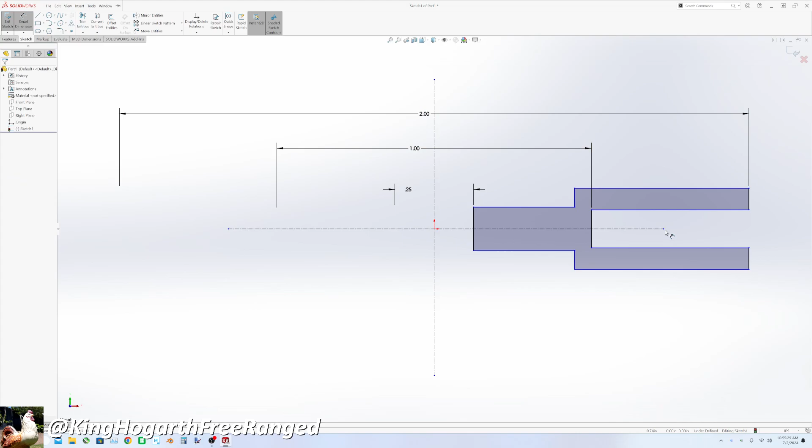So the wheel for this one is a little smaller than the original project's wheel. This one is a 2-inch diameter. I think that one was a 3, maybe 4-inch diameter wheel. So after designing the shape and size of the pulley, I decided to put the holes in the face of it, put 8 holes around the hub of the wheel, cuts down on plastic. Not sure if it has any other benefit besides that, but that's what the original project had, and that's what I'm going to put on here.

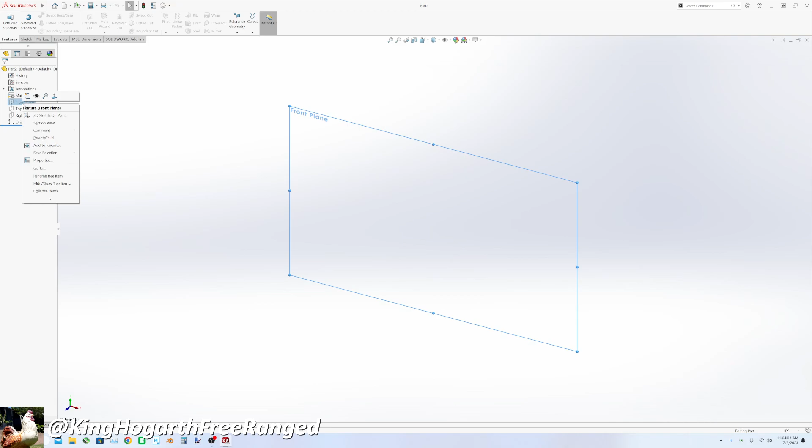Next, I worked on the stand. Now the stand is a very simple bracket looking part with a base plate and 2 right angle protrusions coming out to hold the axle and wheel in, and then there's triangular gussets going up to hold it in place. The base plate also has 2 holes in it to be mounted to things.

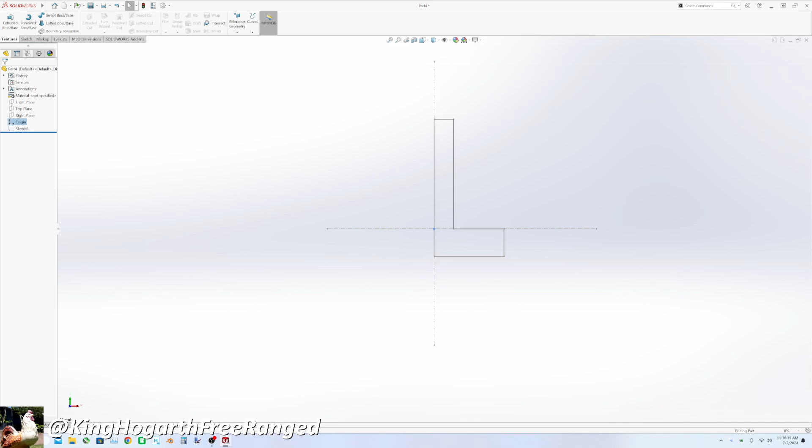After designing the stand, I moved on to the axle, which is a very simple design. It's just a tube with an end cap, and after that I went to the last part, which is the retention pin, which is just a small cylinder attached to an end cap. So to model all these parts, it only took about an hour, but that's probably because I already designed this thing back then and it always kind of lingered in my mind, so it didn't take too long.

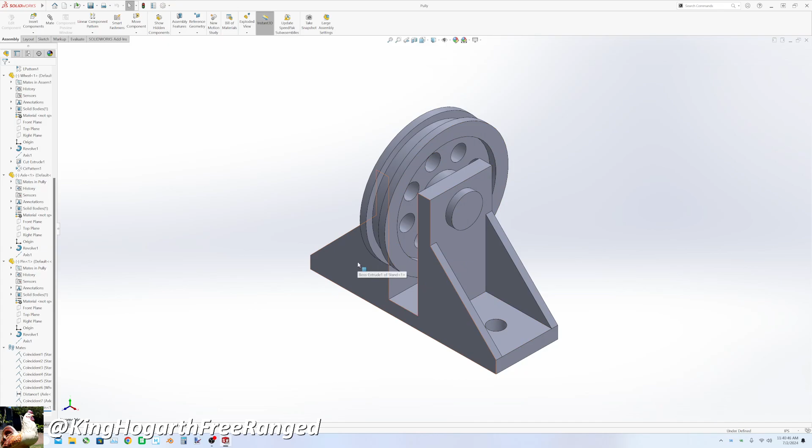So after the designs were complete, I made a quick assembly to make sure all the parts looked okay, and after that exported all of them to STEP files and imported them to Bambu Studio. So after I positioned all the parts and added supports, I sliced it and sent it over to the printer, and it took about an hour to print the initial print.

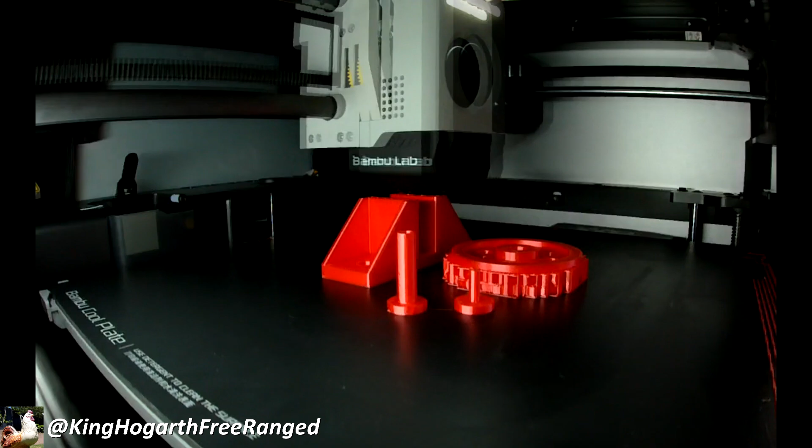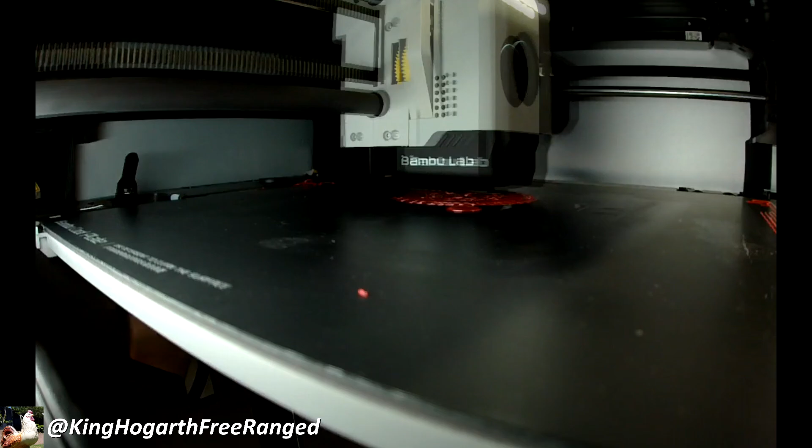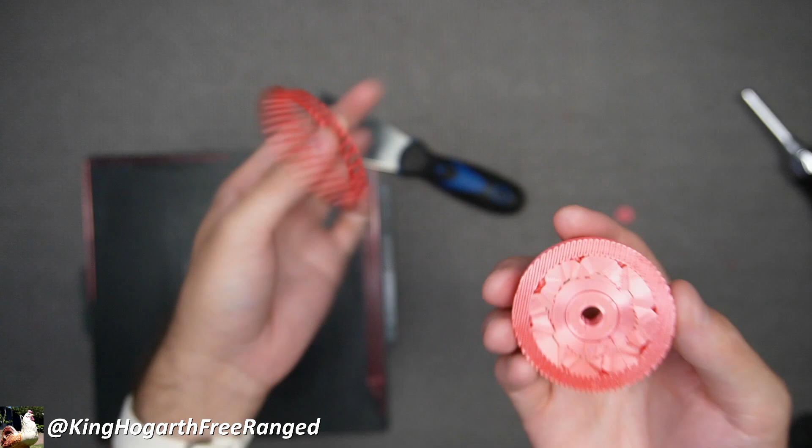After it finished printing, I took all the parts off of the build plate and I broke the retention pin. The retention pin just snapped clean off. And also the supports on the wheel kind of just ruined it. So after that, I decided to reprint the wheel using the tree supports and make a new retention pin with no changes. In the case of the wheel, the tree supports did do better, and it came off a lot cleaner. However, the retention pin still snapped. This time, rather than removing it from the build plate, it snapped when I tried to install it.

So I decided to make the hole in the axle bigger. This also made the walls a lot thinner. So when I decided to print it, I don't think the printer liked how thin they were, so it warped. And it was so bad that the axle had a much larger diameter than what the model had.

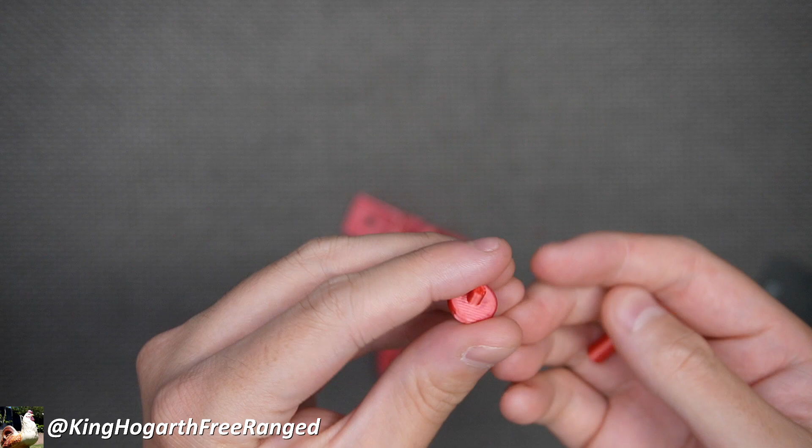And after printing it twice to figure out what was wrong with it and breaking the original stand, I decided to just go back to the original designs, but instead of making the retention pin long, cut it to about half of its original length and adjust the sizes to make it fit a little bit nicer. And after that, it worked just fine.

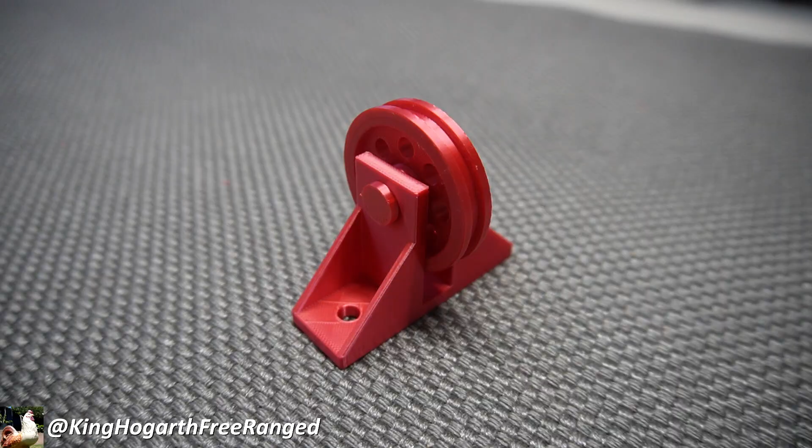So after that success, I went out and printed out another pulley in a little bit higher resolution, and about 2 hours later, we have this very nice pulley here. I think it turned out pretty good. It spins, it's pretty easy to assemble, and makes a nice little desk toy. So that will be the end of this project and this video.